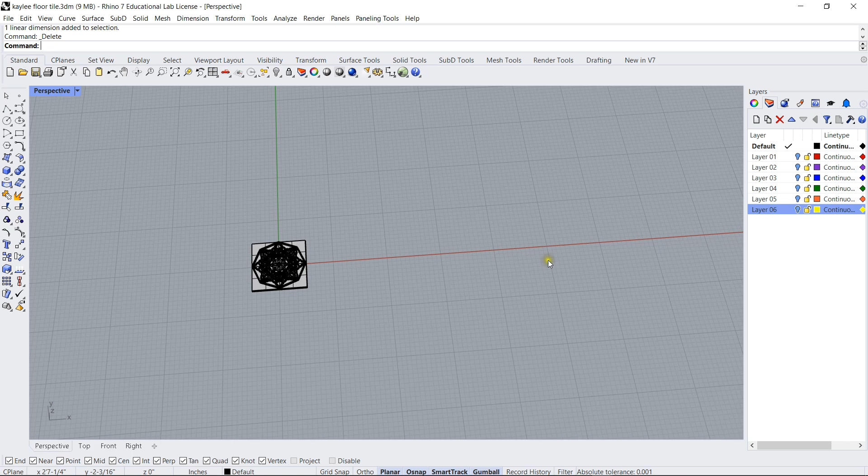Alright, we're going to be starting and going to bring this tile into Fusion so we can CAM it.

So I'm going to file, export selected. I'll export it with the origin. And we'll be exporting as a step file.

And OK. So we're getting an error there.

I'm going to get rid of the curves in this. So I'm going to go edit, select objects, curves, delete those.

And this is open poly surface. Actually, I think I can just export this directly, or just save it directly.

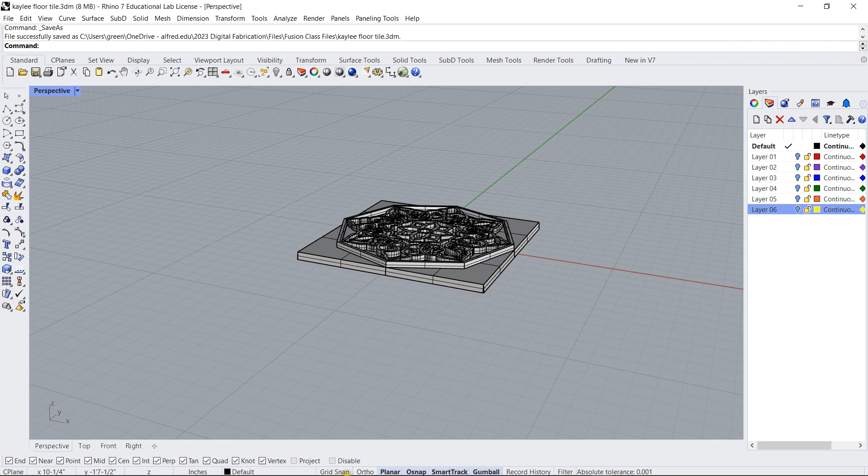So we'll upload that file.

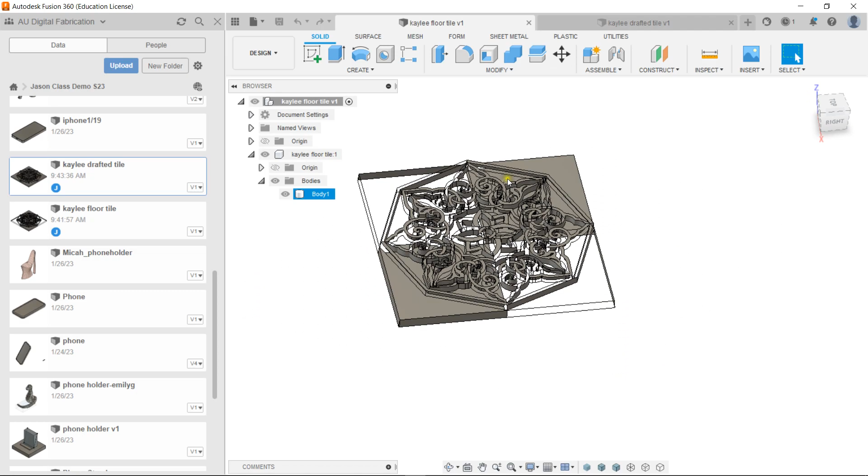So I've imported both the Rhino file and the step file. Here's the step file, and here's the Rhino file, which is interesting because some of it is just displaying as wireframe. So we're not going to use that one.

For now, we'll use the Rhino file. And it's all unstitched. So let's see if we can stitch this together. So go to surfaces and stitch.

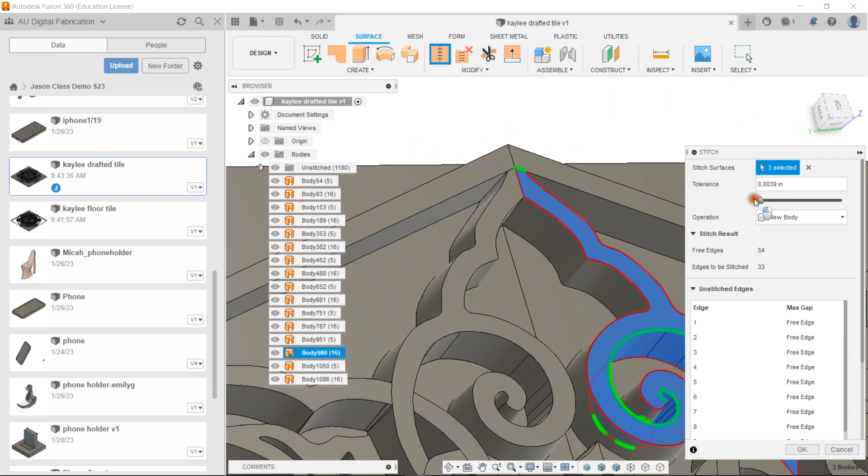See if we can choose those bodies. We'll increase tolerance.

So that stitched a lot of it. See if we can stitch one at a time.

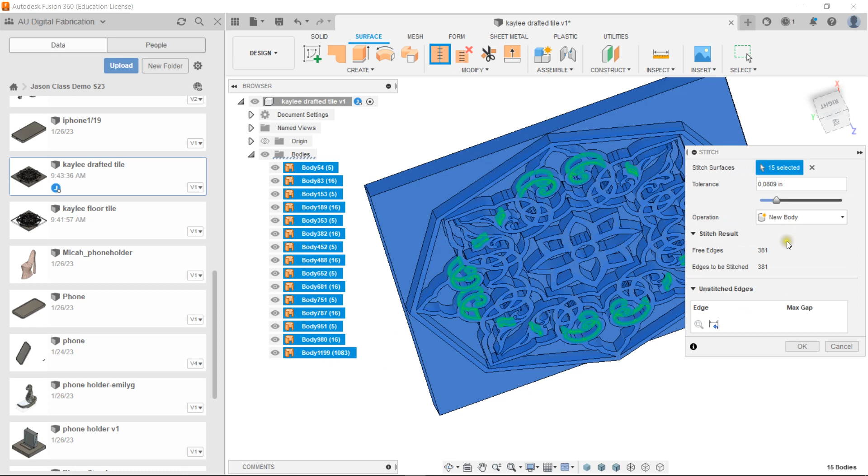Yeah, so now we have one complete body, which is good.

So now we can go to our manufacture space and start a new setup.

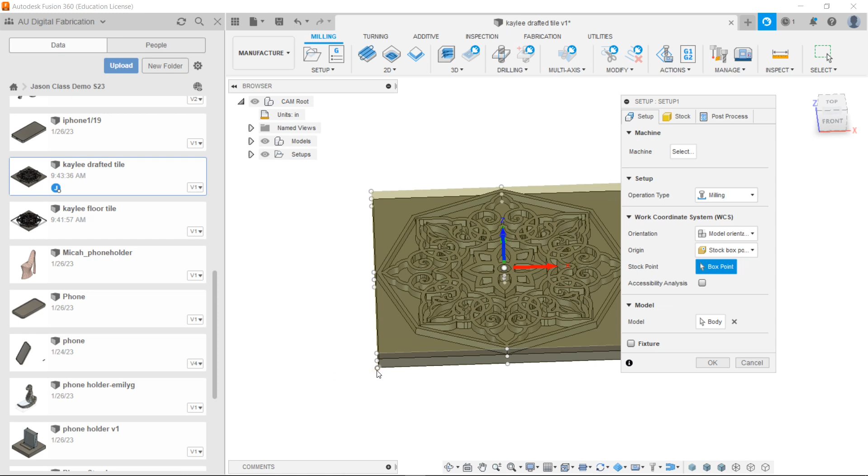We'll be doing this on the easy router, so we're going to choose our box point here. The stock will be a fixed size box.

I'm going to put the model offset from the bottom 0 inches.

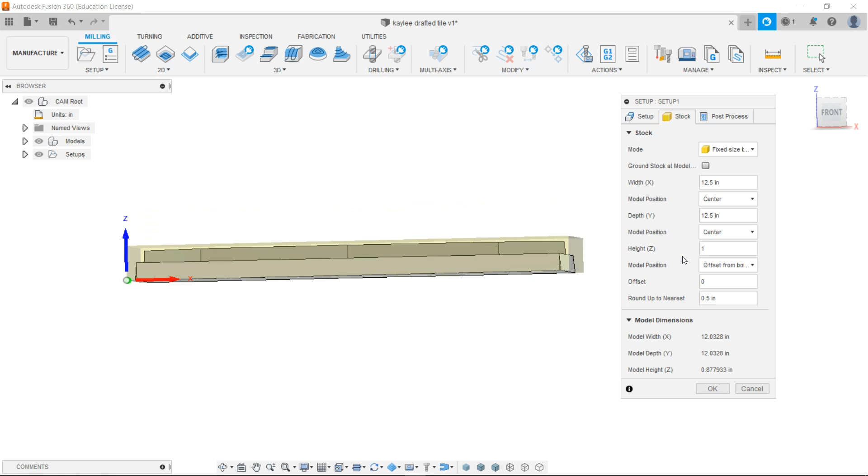And actually our stock is going to be, actually more like, I already faced one side, so it'll be like 1.875. Click OK.

So we're going to start off with facing. We're going to select our tool.

So we'll use milling tools, inch, flat end mill, half-inch flat end mill. We're going to select that.

And I'm just going to say OK. And then that face will come up over here. I can open it up.

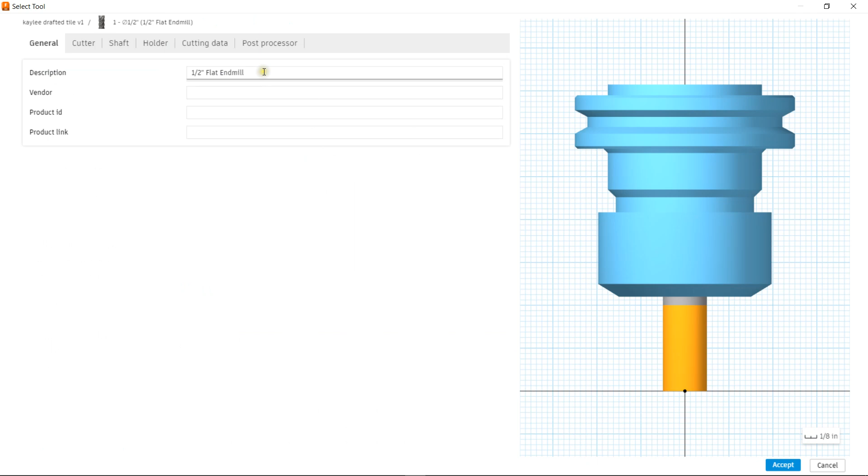I'm now going to edit that tool. So I'm going to edit tool. Flat end mill, we have 2 flutes.

Ours is going to be longer than this. We are going to also go to our holder, remove holder.

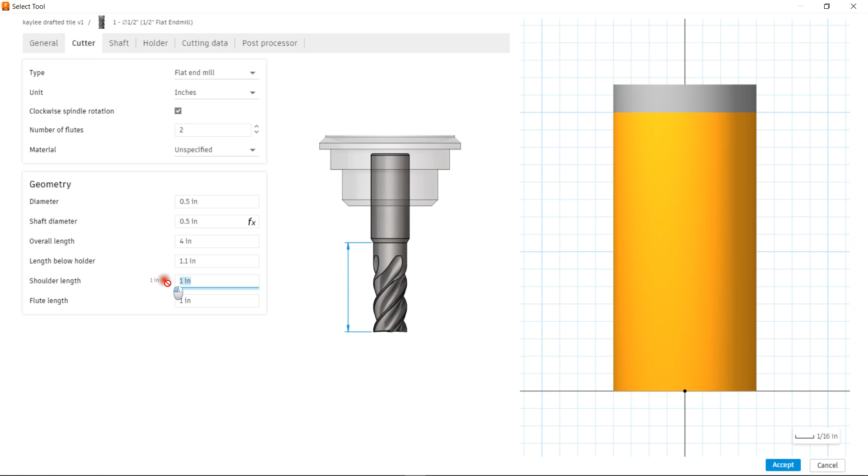Go to our cutter, overall length, we'll put in 4 inches. Flute length 1 inch. Shoulder length 2 inches.

So we'll have to make that 2.1. And we can accept that. And then select it.

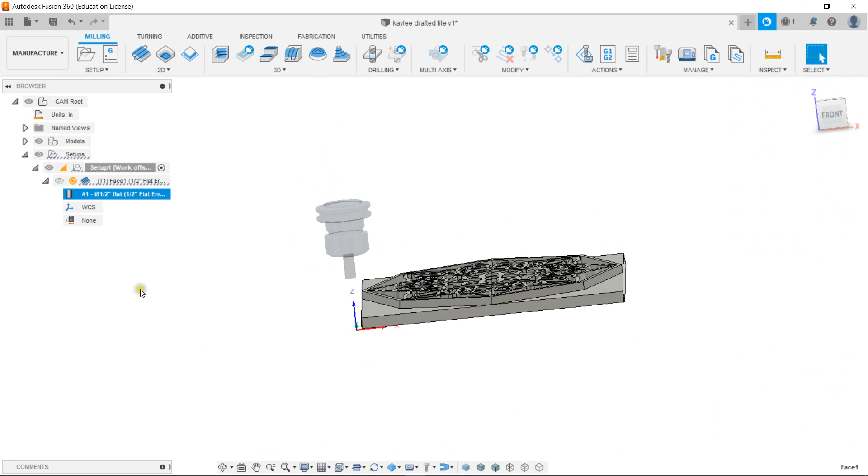And go back to edit our toolpath. So it already selected our stock, the height, we'll choose model top for the bottom height, which will be that, these surfaces.

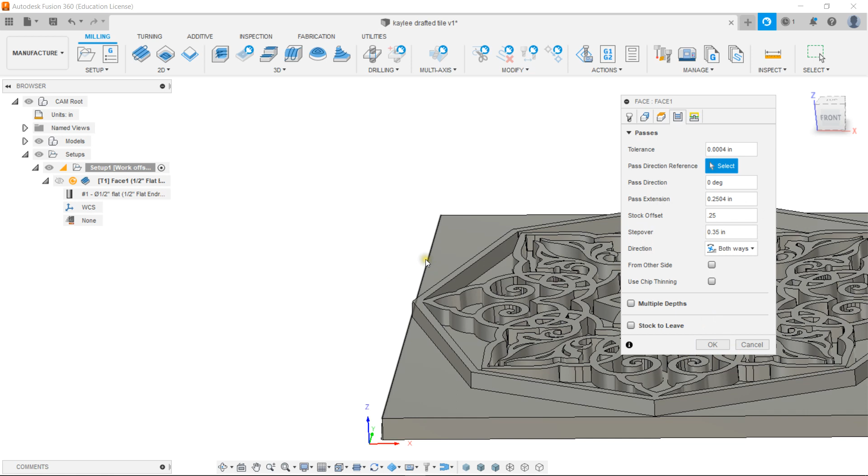Step over 0.35. I'm going to put in a 0.25 extension, just because our stock might need a little bit extra off of the sides. And we'll generate.

So now you can see we've got it going over there and there. And then we've got our green check mark, which means that's okay.

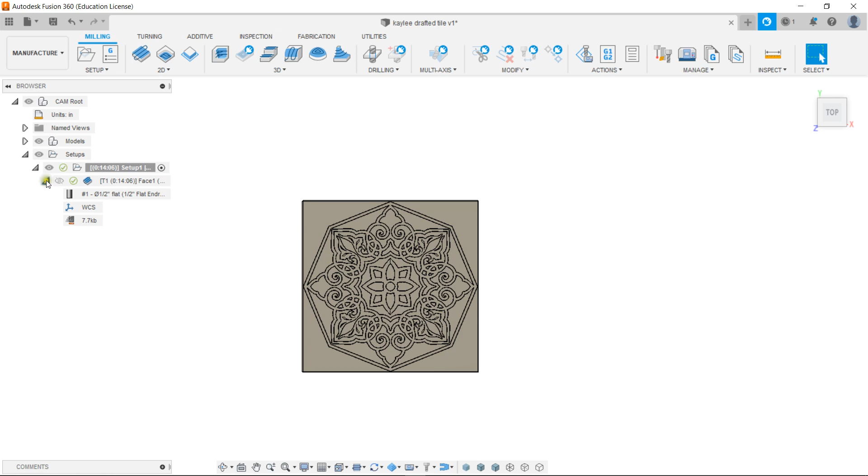So our next thing will be our 2D contour. Our geometry will be there. Make sure that arrow's on the outside. Our height is going to be a selection for the bottom height.

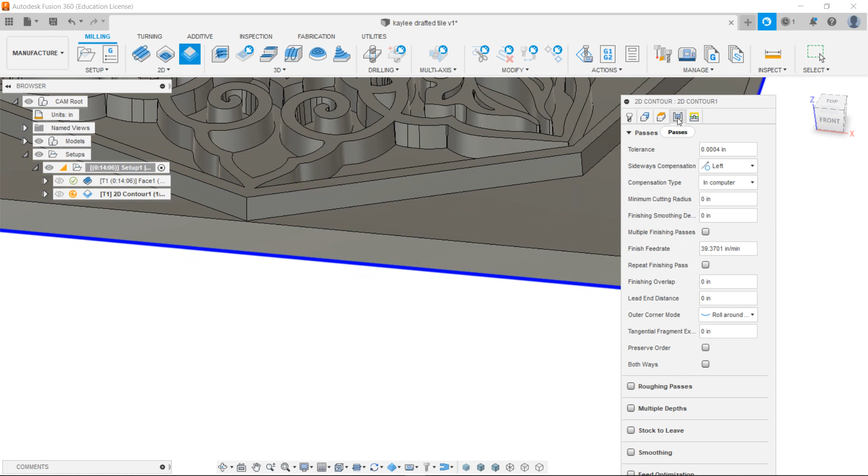So that'll be for that bottom edge. Click OK. Generate.

So that's a full inch that it's going to be going all the way down. So we are going to come in and put in passes, multiple depths. We'll put in a 0.5 maximum step down.

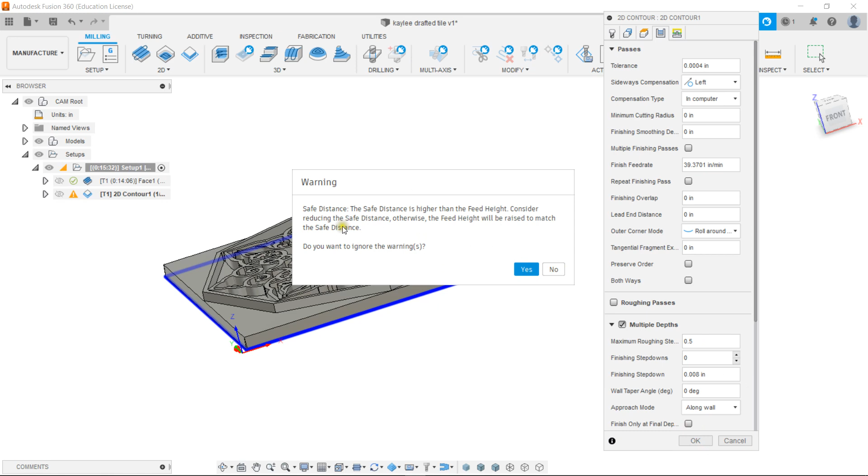And then it tells us we have this error, which it says it will be raised to match the safe distance. We'll just say yes for this for now.

Regenerate. So now I have a few different step down passes.

One other difference or change I can make is I'm going to put in a ramp, 5 degrees.

So now you can see the red is ramping down rather than just plunging. And then the safe distance, put to 0.2.

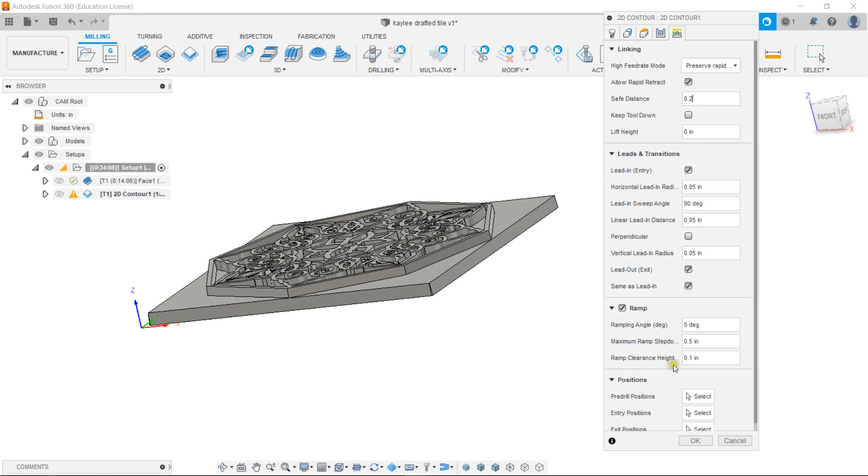Generate again. We've got our green check mark.

And then we're going to do pocket clearing. And again, we're using our flat 1/2 inch.

We'll do tool outside boundary because we have to get to some of these areas that are outside our model. Select all the surfaces. And let's see what we get from that.

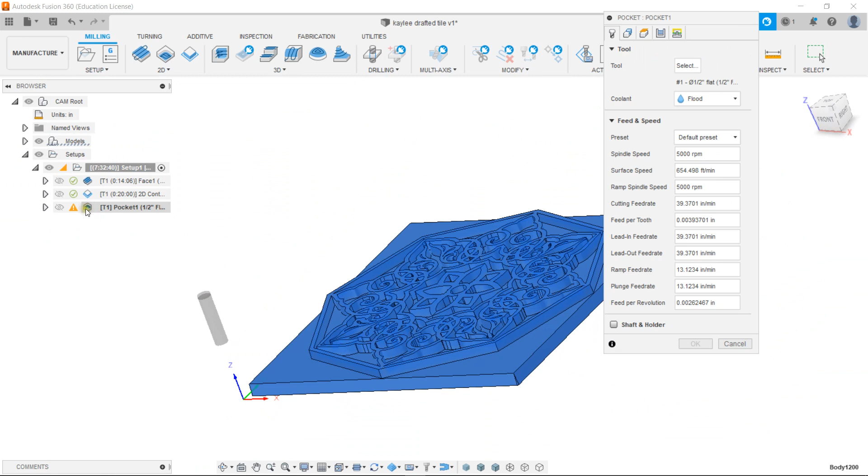So we have quite a small step down on this step over. You can see that we have almost a 7-hour machining time. So we're going to come into our passes, manual step over.

0.3. And here, maximum roughing step down, we're going to put 0.25.

Regenerate. So again, we need to maybe restrict some areas from being cut that are flat.

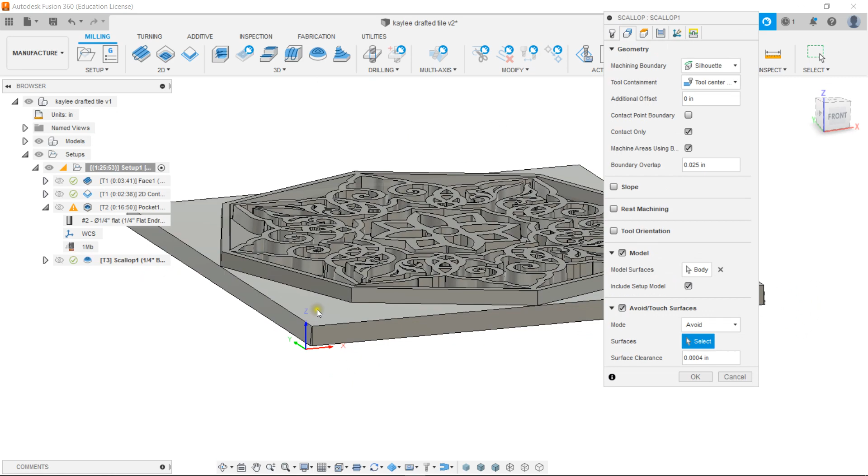So here we're going to select our model, just the whole body. Avoid surfaces, we want to avoid that, and avoid the top surface. Click OK, generate again.

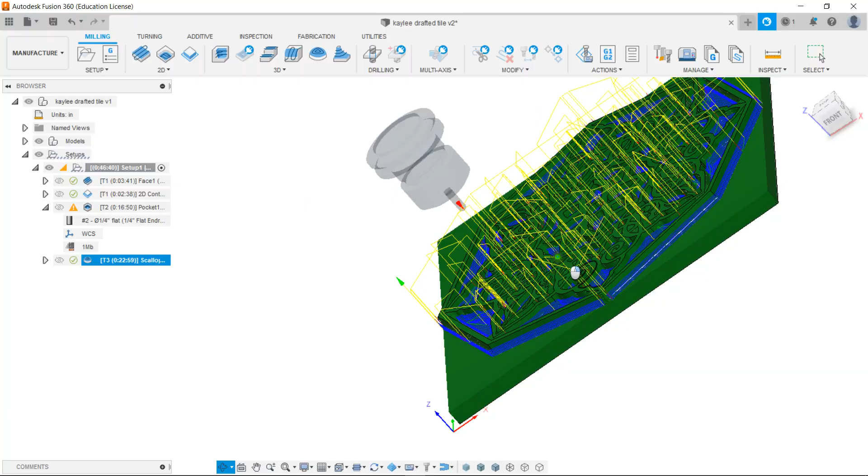So it looks like we'll have to go in with quite a bit smaller. So I believe I have a ball end mill that is a little bit smaller, 3/16. I'm pretty sure that I have.

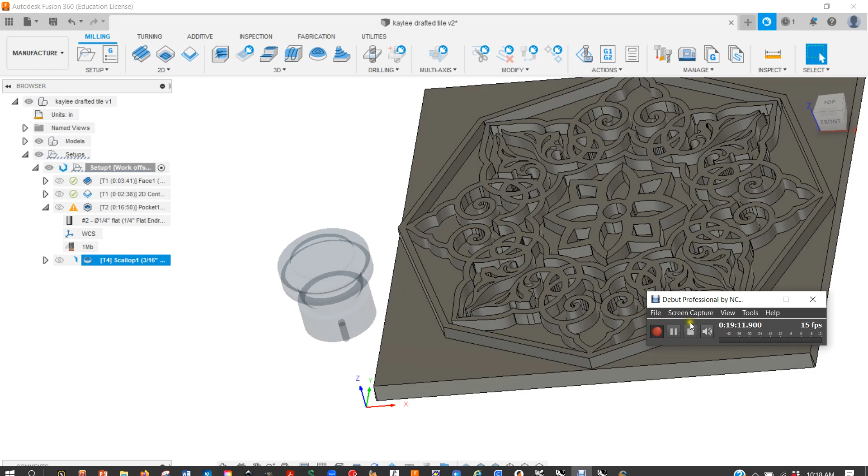Generate again. So that's done generating, so we can see that still it's not reaching a lot of those smaller pockets.

That's running for an hour. So for a minute here, I'm going to do create derived operation, 3D milling scallop again. Just click OK, right click on this and suppress it. And then we'll come over here.

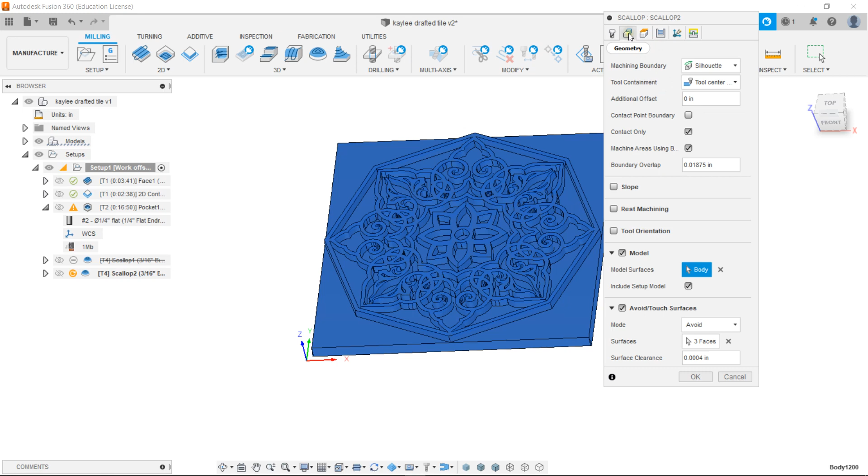And we will grab an 1/8 inch ball end mill. And generate that again.

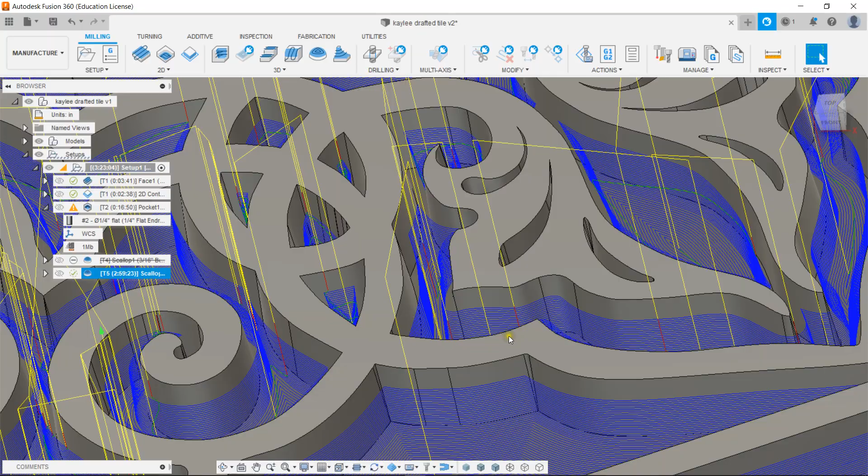So you can see that this is 3 hours. We're going to see if we can avoid some of these bottom flat surfaces and see how that affects the time.

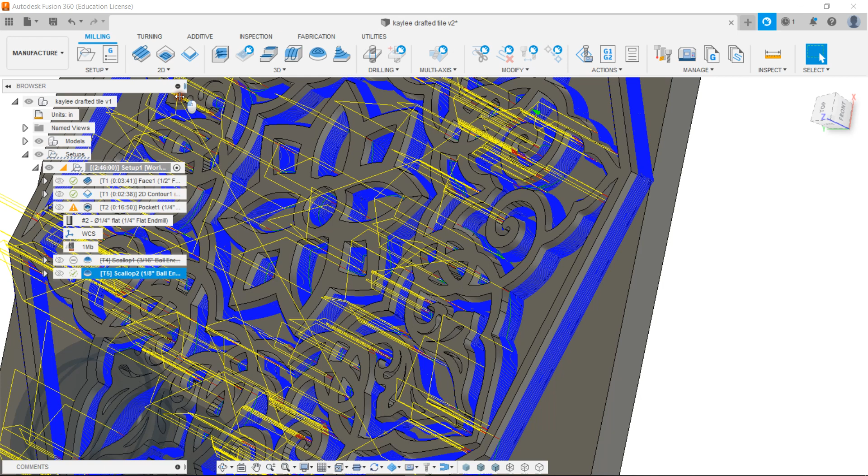Generate again. So that seemed to be pretty helpful. I'm not sure why it's not giving me the time for this one. Oh, there it goes.

So I'm just going to simulate the entire tool path.

And you sometimes have to wait for this to catch up. So I'm just going to go to the end of the toolpath. You can see here, down there, it's generating.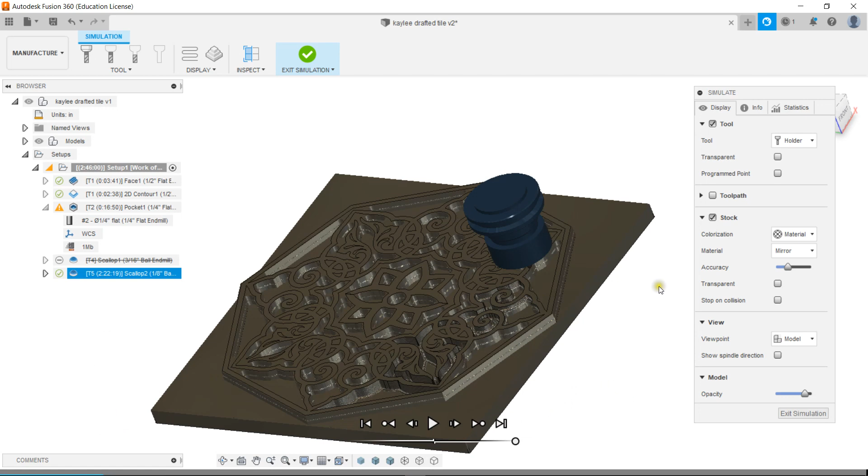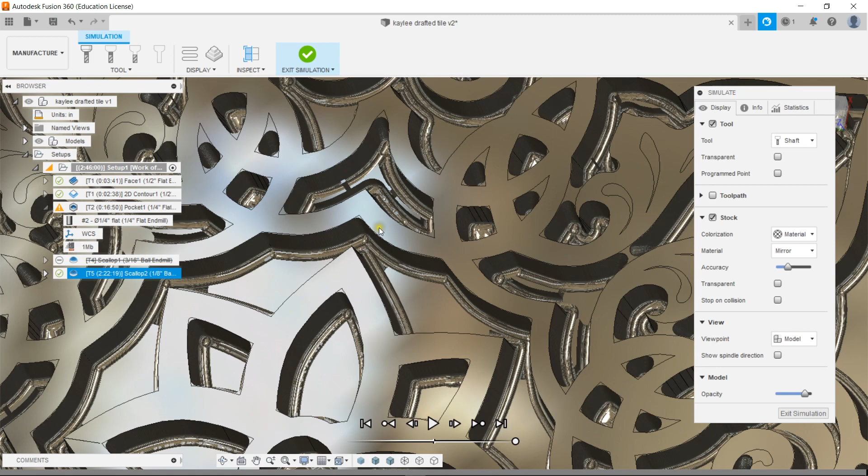And I also just want to see the flute, which is right there, or this shaft. So that is getting into some of those smaller places. Even the 1/8 inch though can't get into certain areas.

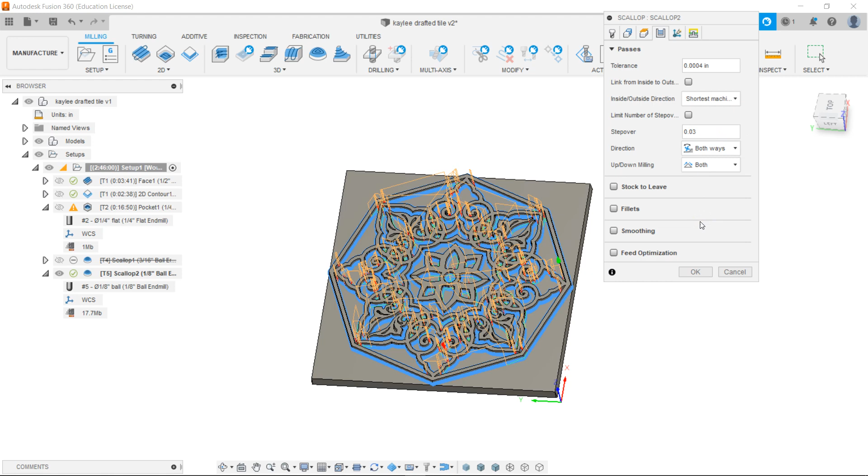Put this to 0.03. Minimum retraction. Let's try shortest path.

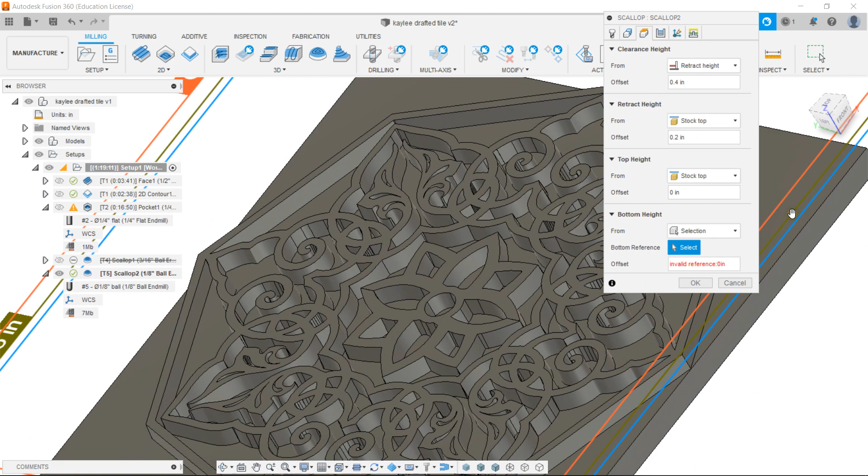I'm also going to come in on our heights. We'll do this from selection. That'll be our bottom height.

So up here I can turn my model off, and then that'll show me exactly what's been cut from the stock. So if you look closely, there's some places missing that have not been cut.

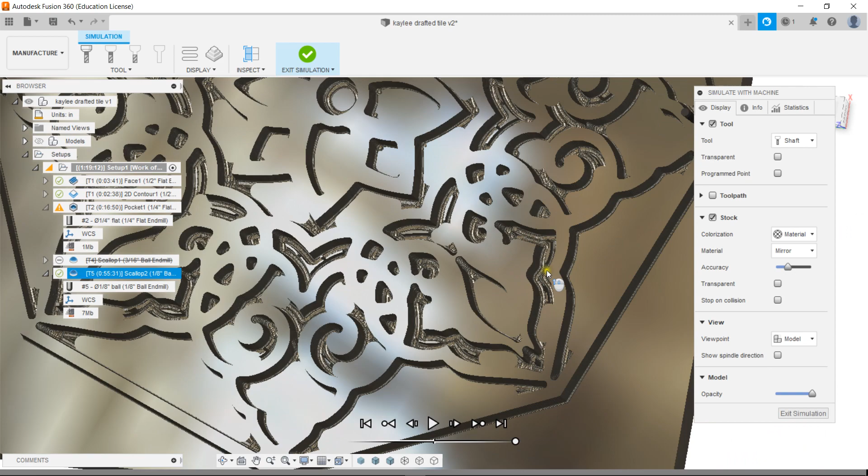So we need to put in a toolpath which can also cut those. We'll exit the simulation.

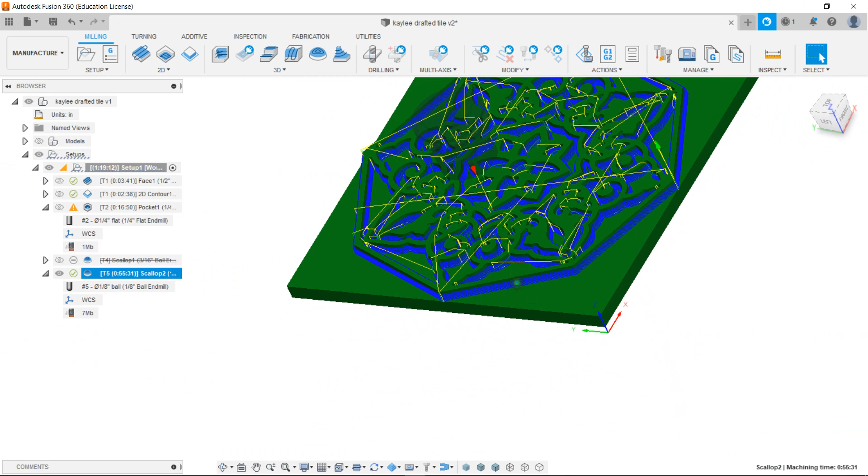And I'll have to check, I might have a 3/16 flat end mill. So if I come into my tool, flat end mill, 3/16.

Turn my model on. And then we'll regenerate that.

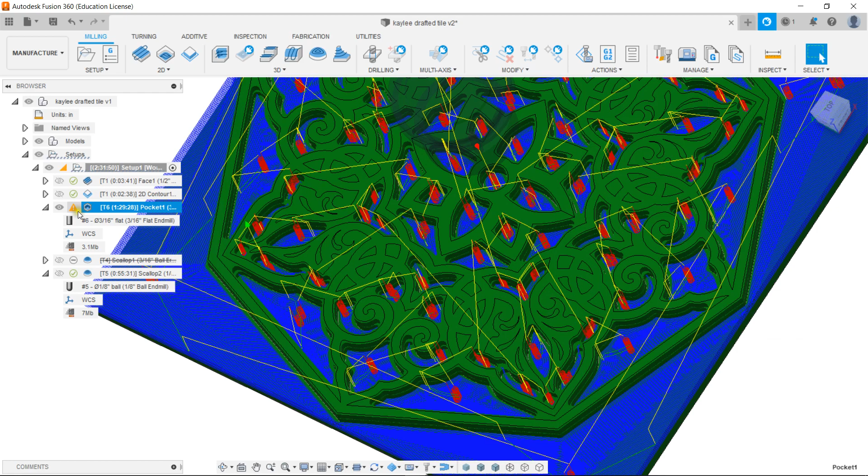So I can probably see if I'll be able to just choose the surfaces.

Actually, I think I'm going to keep that 1/4 inch first. So I'm actually going to put this back to the 1/4 inch. Generate that.

Create a derived operation, 3D milling pocket clearing again. Just click OK, drag that up here.

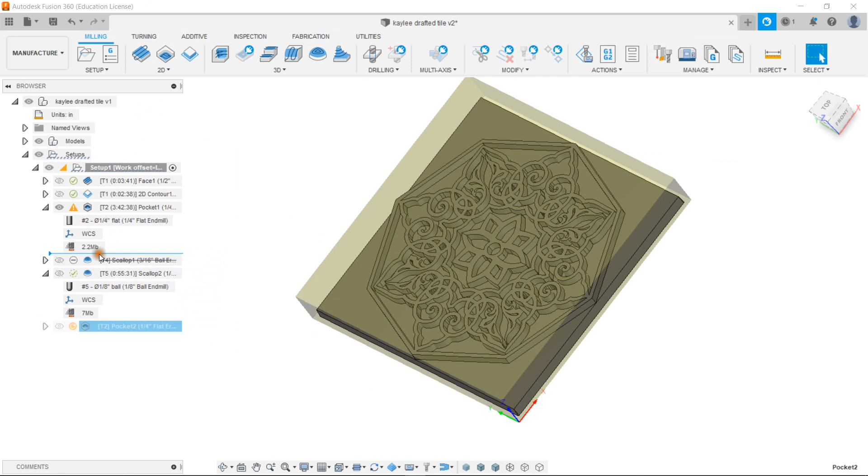And I'll just try it with an 1/8 inch because I'm not sure that I have a 3/16 flat. So milling tools, flat, 1/8 inch.

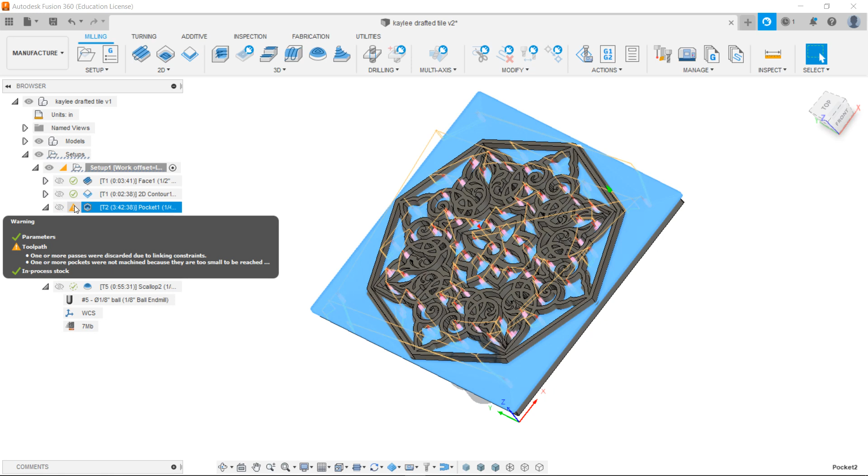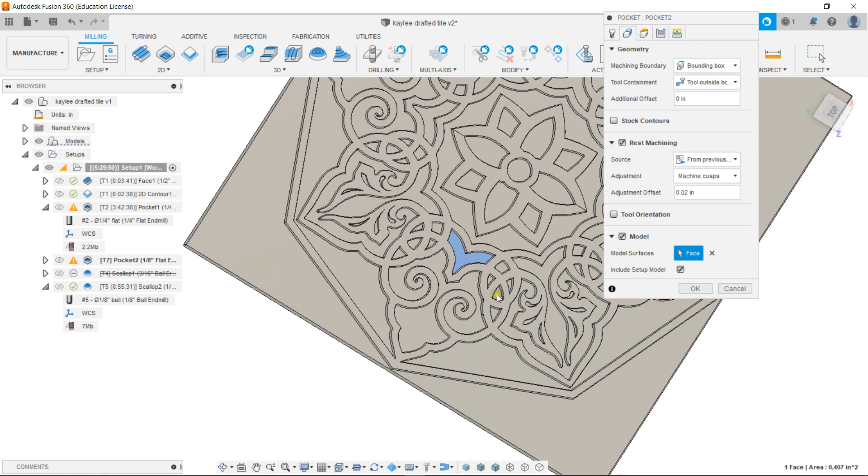So I'm going to actually select the specific surfaces. So I think there's... I think I got all of those. Okay.

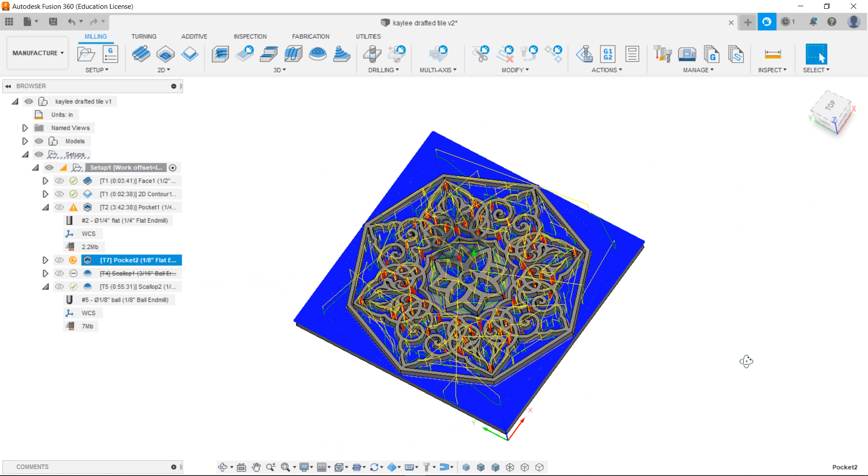Regenerate. So we'll see if we can limit some of this out here in that operation so it doesn't take so long.

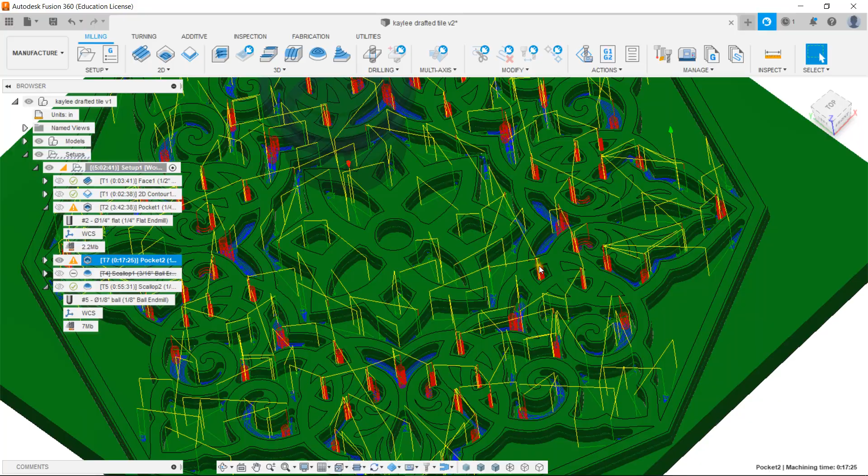So I changed the setting over here, geometry, rest machining, machine cusps, and that really limits what's being cut and going in and cutting some of those flat areas that the 1/4 inch could not get into.

So that's looking good. And then I've got this final scallop, which is looking good for the moment. So let's simulate the whole thing and see what it looks like.

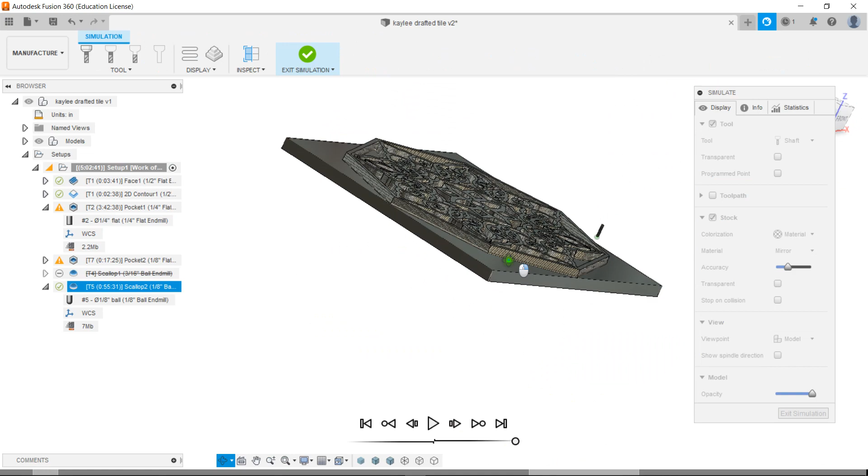So again, I'll turn this model off and we can see we no longer have those little areas that were sticking up before. Get a little dig on that one.

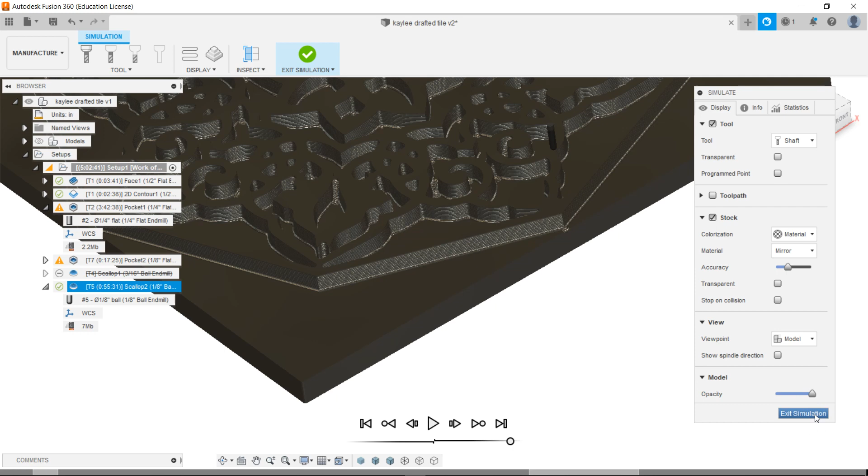So I'm going to see if I can make a couple changes. I'm going to go to selection filters, and just have body faces on there, and then it's just going to select those faces.

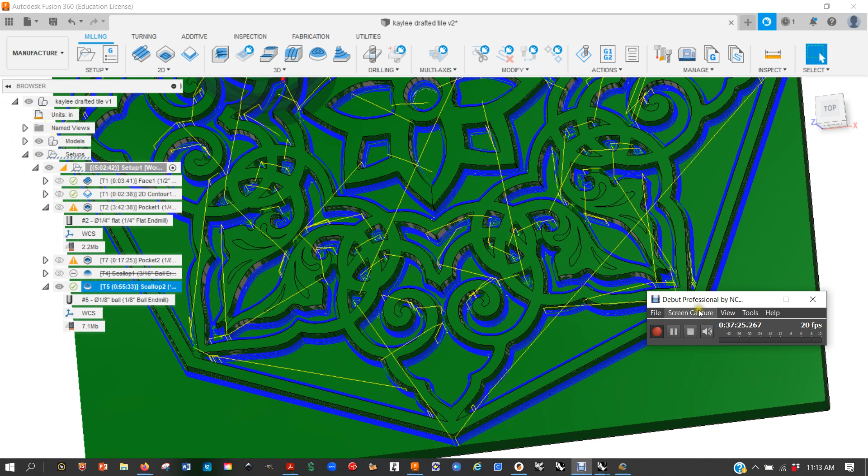Generate that. That looks pretty good. I'm gonna go in and select some of these smaller areas just to see if I can get in there, that 1/8 inch. And that's my last space to select.

Okay, I'll generate again. Alright, that's generated now. So I'll go to the simulate again, go to the end of the toolpath and generate.

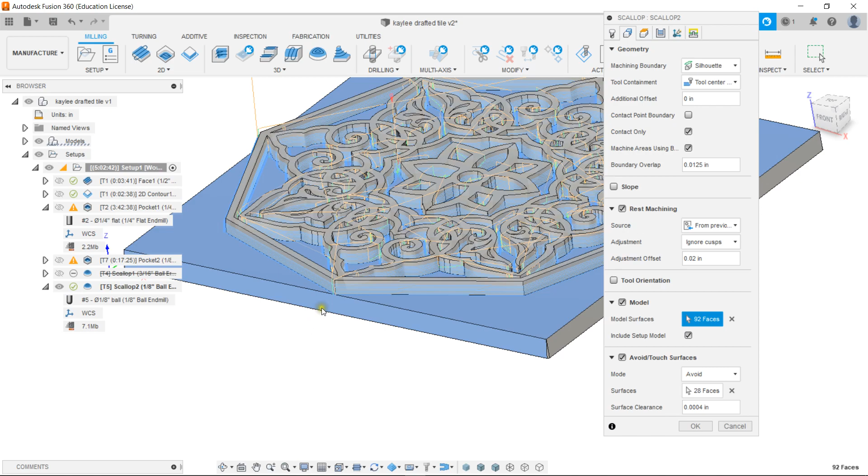I'm going to add these faces as areas to avoid, just to see if I can prevent that sort of dig over there.

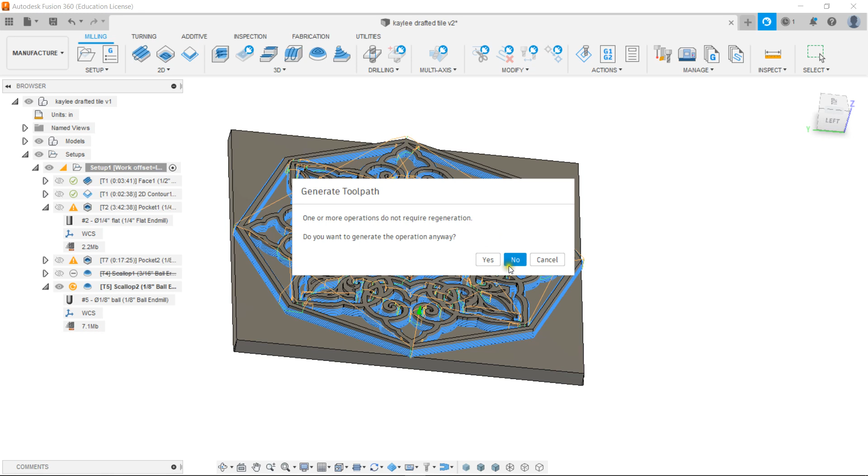Generate. Alright, so we do have some little things which are a bit difficult to get around, but I think we'll go with that for now. Sometimes it's more pronounced in the simulation.

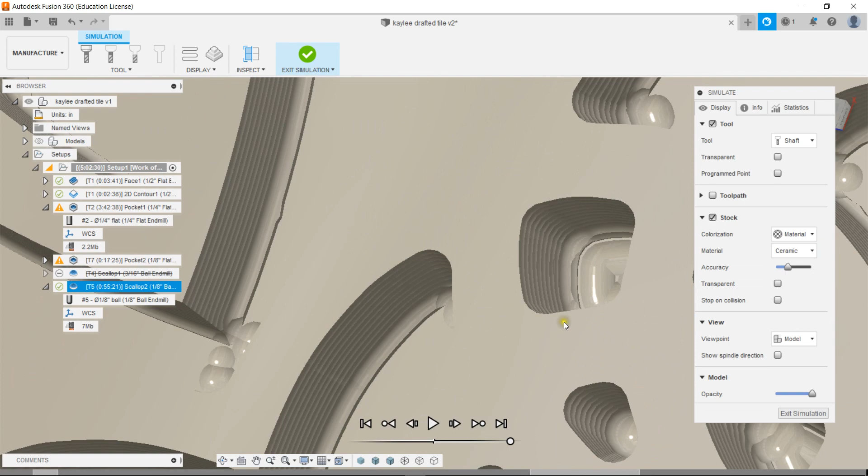So we'll exit this, turn my model back on. And then I'm going to go through to make sure my speeds and feeds are correct. Well, actually my feed rate, because the Easy Router doesn't control the spindle speed since we have a router.

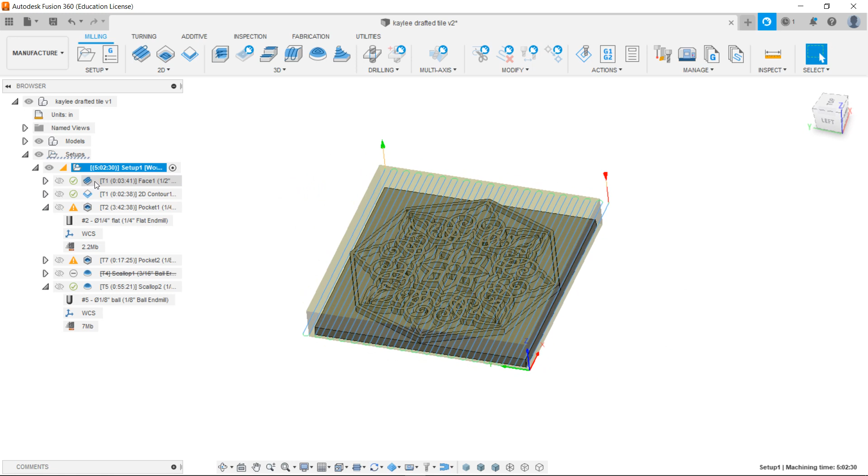So just make sure that those disable flood, 150, 100. Heights look good, that looks good. The contour looks good.

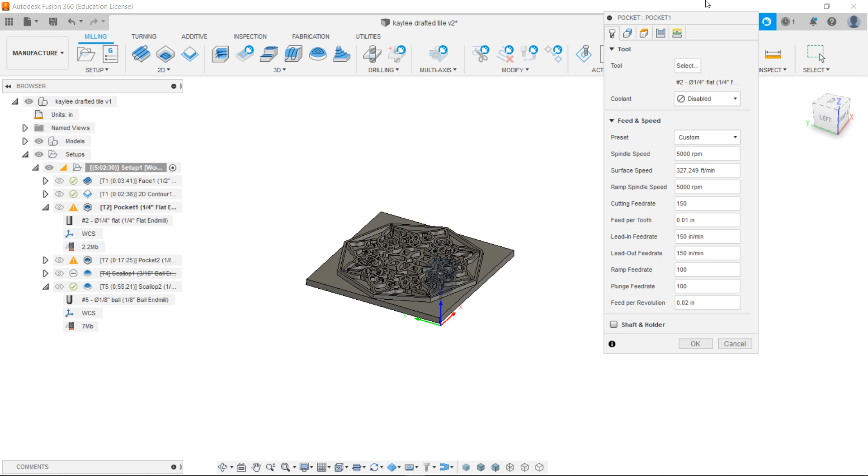So this is coming in with my 1/4 inch. I can increase this step over. That's a 1/4 inch, that'll be 0.125.

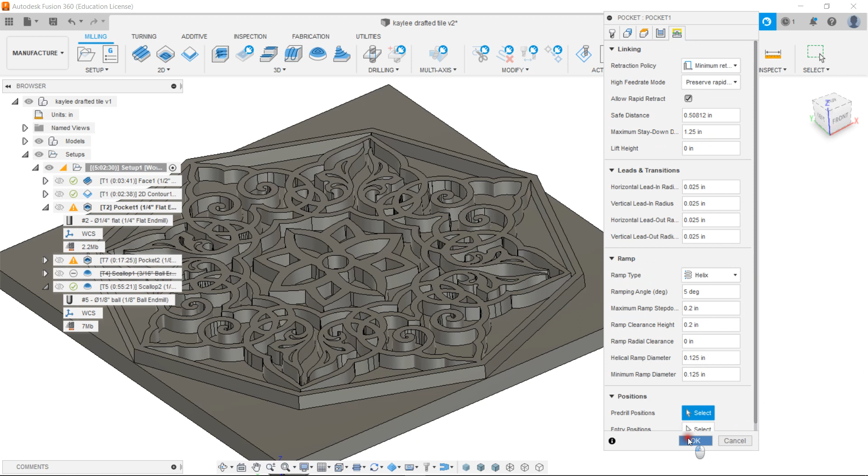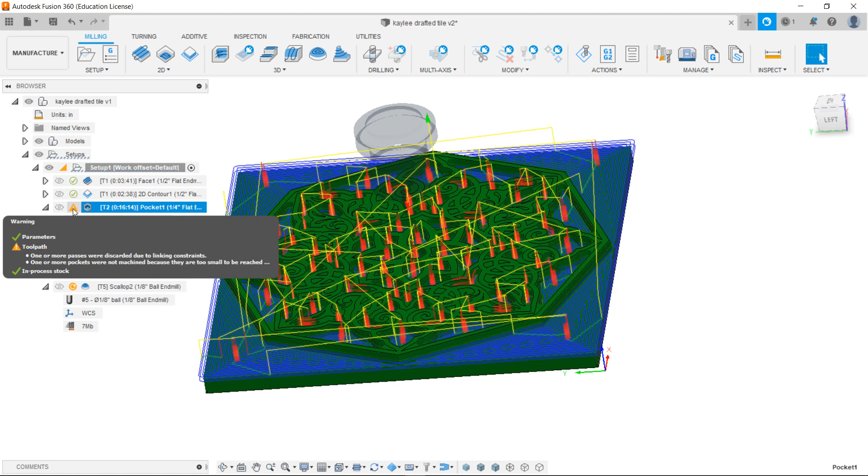And I made some adjustments to that earlier. So that's good, that's down to 16 minutes. It's just saying some of the passes were discarded because of linking constraints, and some were too small to be machined, so that's okay.

This needs to be regenerated now, if you see that orange with the arrow. So with the 1/8 inch, you can see that I do again have these errors, or warnings actually, the same as the last one, but this looks good, we can deal with that.

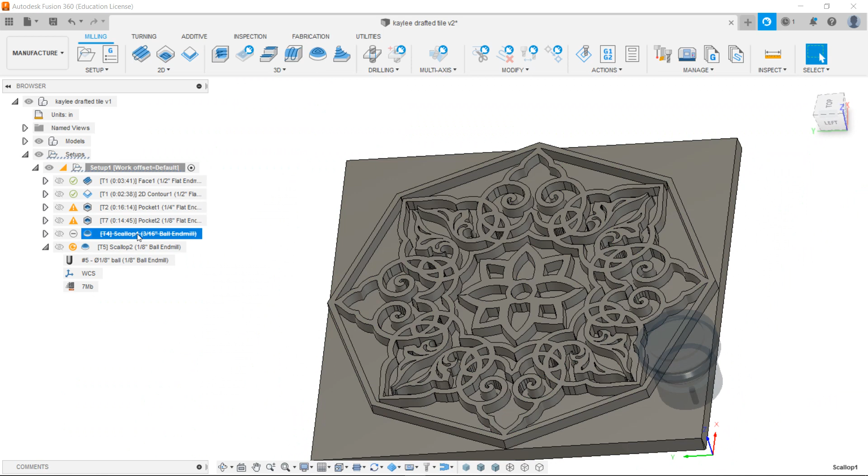This scallop we can delete, and that's our final scallop with an 1/8 inch ball end mill. Just want to make sure. Yeah, I do have that.

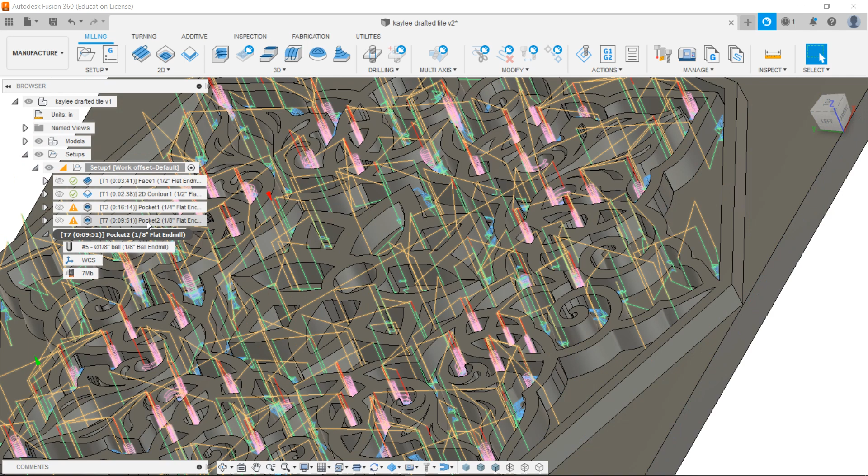So one thing I could try to do is do this all with an 1/8 inch, but I think, no, I don't want to do that because getting that out there, so we're just thinking about how many tool changes we're going to have to do. So there's 1, 2, 3, 4 different tool changes.

The scallop, I'm just going to look again at the speeds and feed rate. Again, the spindle speed, for our purposes right now we don't need it.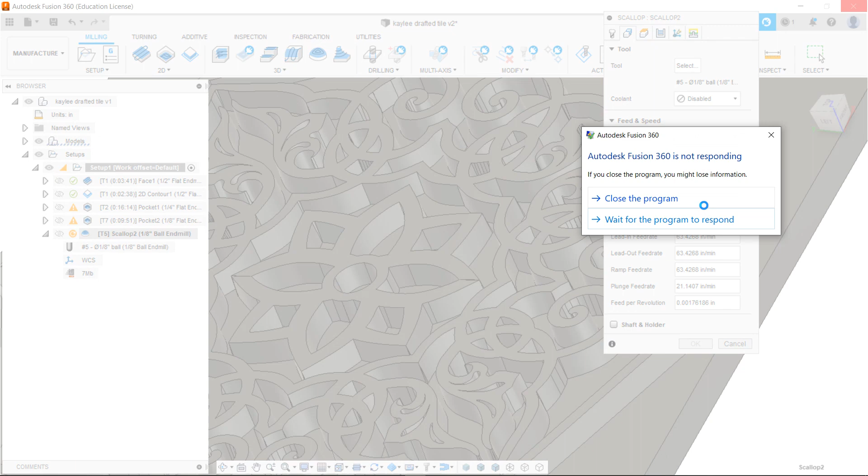And the program crashed. Oh, the program uncrashed itself, which is good. I'm gonna save it.

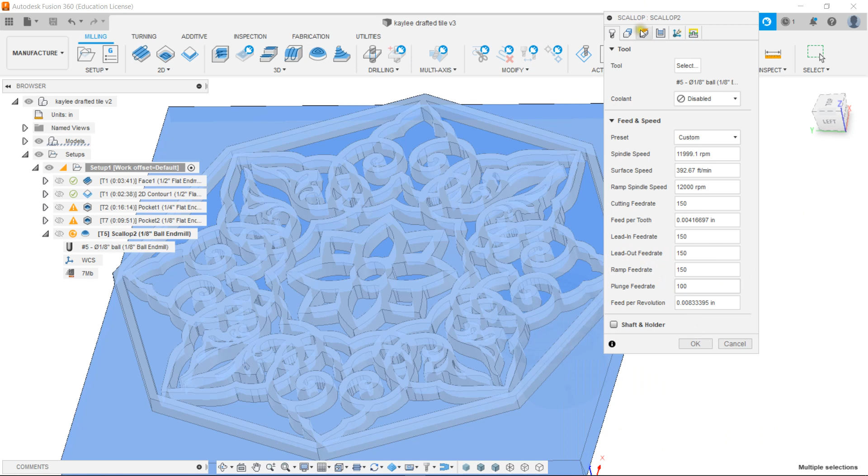150. And final generate for that scallop path.

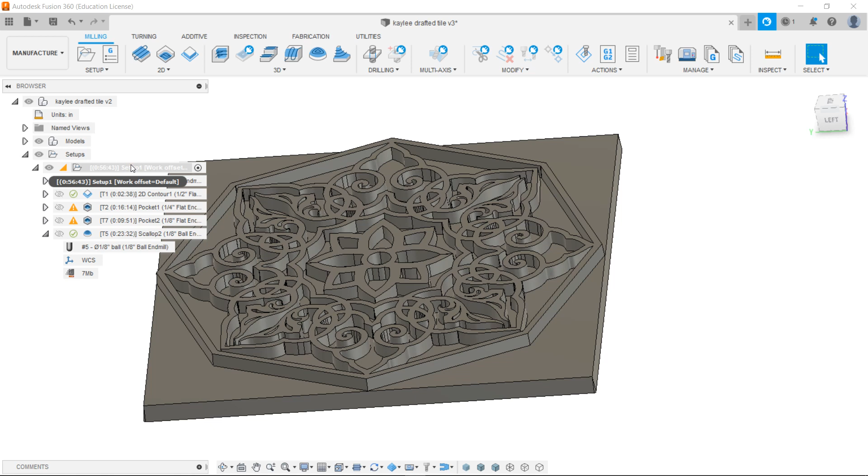So I can go through my toolpaths again here just to take a look, and that looks good. Total machining time, we've gotten that down to an hour plus, 2 or 3 minutes for tool changes and setup. So hopefully I can get this done in like 2 hours or so with everything.

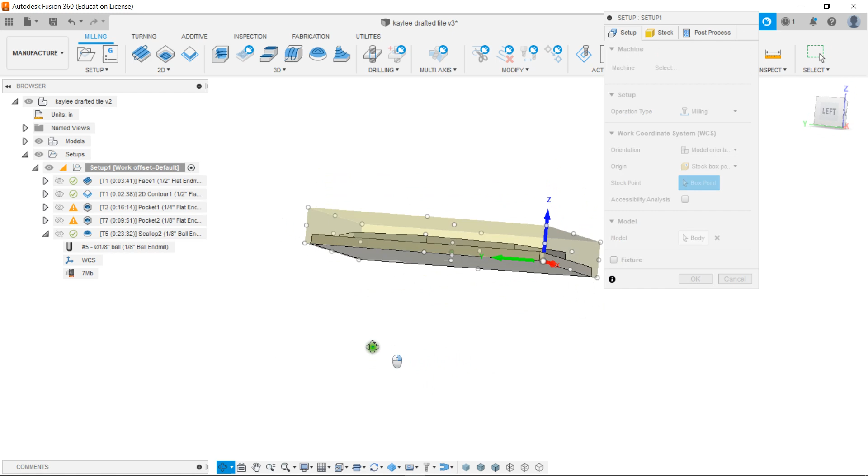So now the next thing we would do would be to post-process. And for the Easy Router, we also need to make a change to our setup, or at least be aware of the setup. So on the Easy Router, the Y is coming at us when we're standing in front of the machine.

So when we set it up, this rear right hand corner would be the G54, or we could move that to any corner. We just need to be aware which corner it's on. So that looks good. And now I have to regenerate everything just because I made a change in that initial setup, and that'll take a minute.

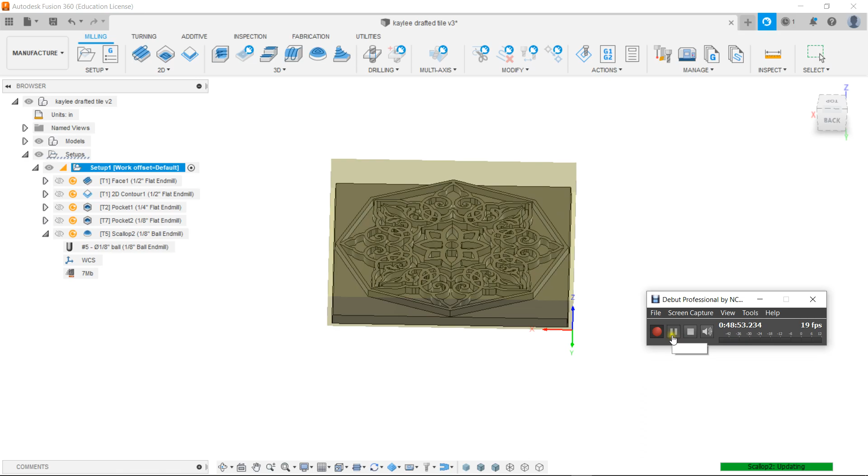Alright, so we can post-process these now to generate the G code. We want to do it separately for each tool. So we can select the face and the contour, because those are both using the 1/2 inch flat end mills. Post-process.

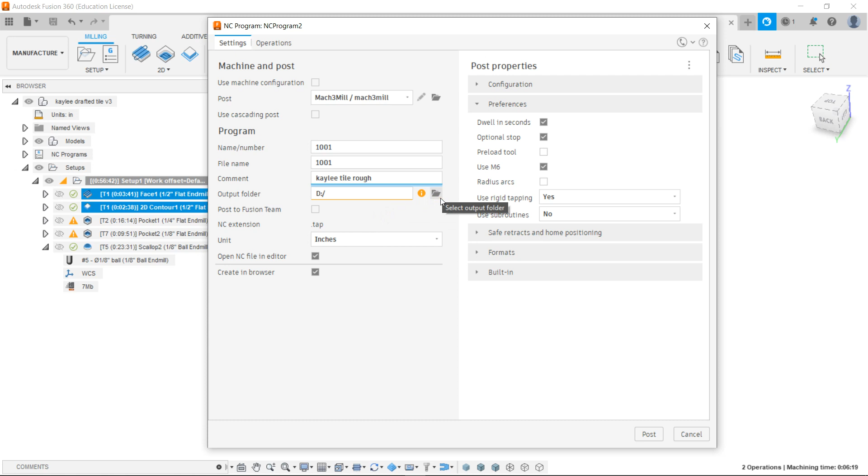We're going to be using Mach 3 mill. Give our number and comment, so we'll say kaylee tile, rough, and put in my USB drive. And I'm going to post that.

And then G code will come up. And on the Easy Router, we can't use G54, so we have to change this to G55. And we'll do file, or under edit, find.

I just want to find G54. There are no other G54s in the program, so that's good. We have our G55. We have our comment here, so we know it's the correct program. I'm going to save that and exit.

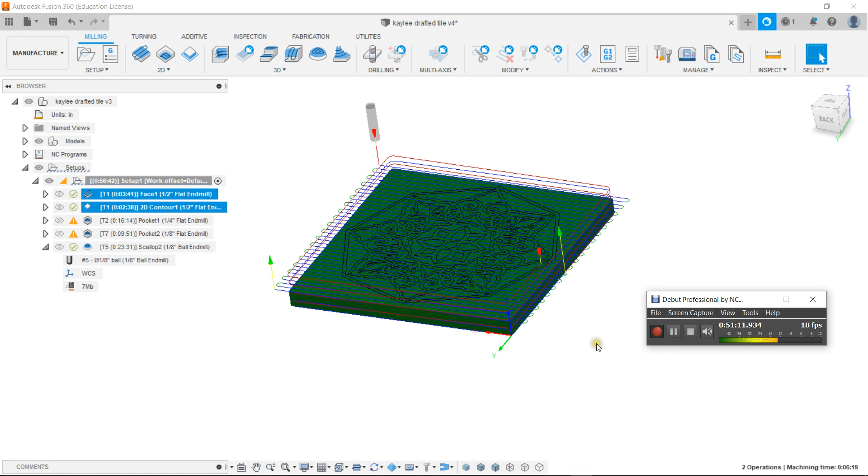And we'll just keep going through those and posting them as we go. And that's a little bit of a long demo, but would have been longer without using the pause button. Thanks.